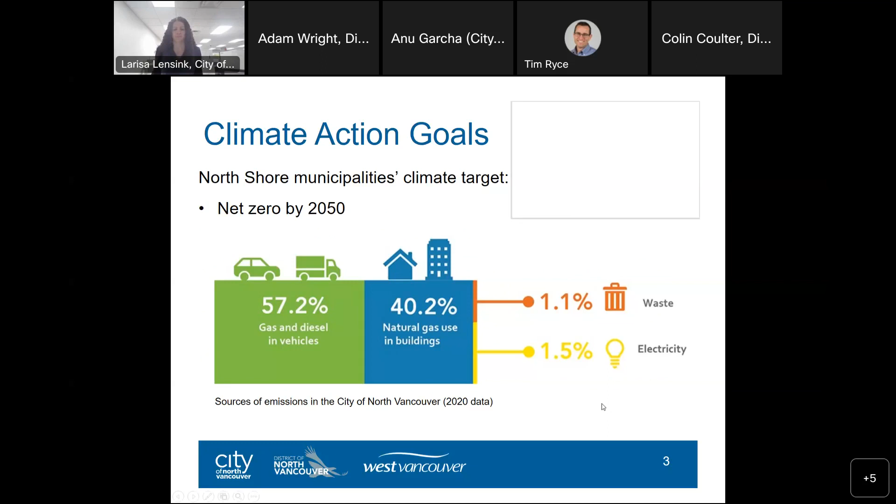On the provincial level, the province has set clear targets for new construction to be zero carbon by 2030 and net zero energy ready by 2032 in the Clean BC Plan and the Clean BC Roadmap to 2030. These two plans recognize the need to both increase efficiency of new construction and transition to low carbon mechanical systems like electric heat pumps in order to reduce emissions from buildings and improve comfort.

The primary tool the province has developed to increase efficiency of new construction is the BC Energy Step Code. The Energy Step Code provides a pathway to incrementally increase energy efficiency over time through a series of steps with defined energy efficiency metrics. The Energy Step Code is performance-based and compliance is demonstrated through energy modeling alongside air tightness testing. Local governments can choose which step to adopt and when to move to the next step along the path to net zero energy ready construction.

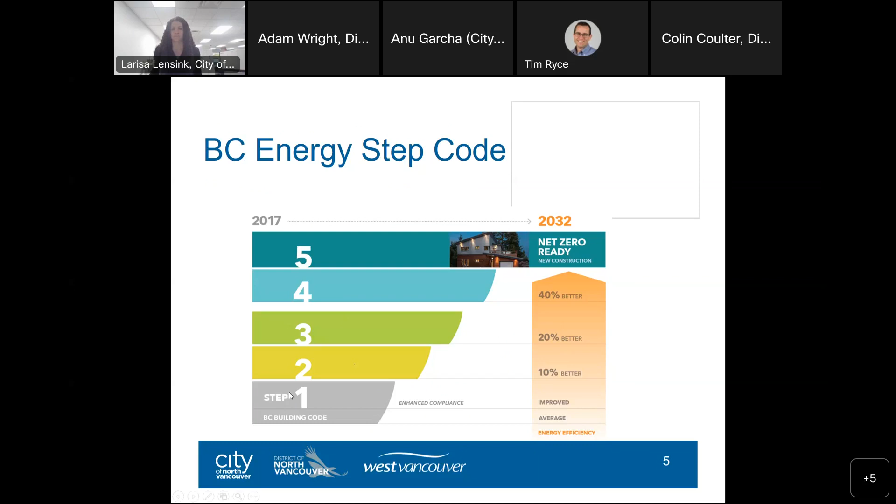Over time, the province will change the minimum energy step code requirements in the BC Building Code to ensure energy efficiency improves across the province and ultimately achieves net zero energy ready standards by 2032. As of May 1st of this year, the BC Building Code requires that all new Part 9 residential buildings are built to Step 3 across the province.

The building community on the North Shore has been a leader in achieving high energy efficiency requirements over the last decade. Prior to the introduction of the Energy Step Code, the North Shore municipalities offered a density bonus for high energy efficiency ratings. With the launch of the Energy Step Code, the North Shore municipalities adopted Step 2, which was equivalent to the current standard incentivized through density bonusing.

In July 2018, we increased our requirements to Step 3 for Part 9 residential buildings, and builders have been consistently meeting or exceeding these targets for the past 5 years. In July 2021, we introduced a low carbon pathway to incentivize low carbon energy systems, requiring either Step 5 or Step 3 with low carbon space and water heating systems, primarily achieved with electric technologies.

The 3 North Shore municipalities have worked closely together to coordinate step code requirements and provide consistency for builders across the North Shore. This sub-regional coordination has been used as a model for other local governments, and the building community that has developed on the North Shore is recognized as among the most advanced in the province.

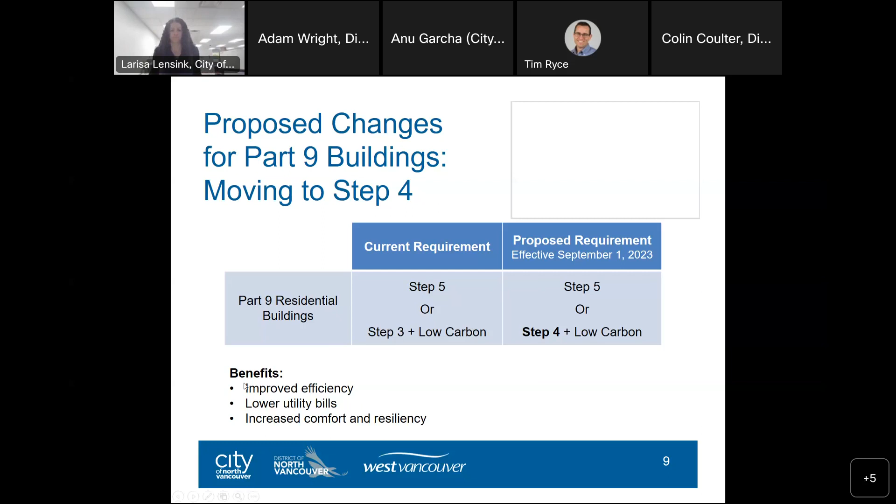The energy step code for Part 9 homes has 3 performance metrics: airtightness, equipment and systems, and building enclosure. This slide shows how the Step 4 metrics compare to our current Step 3 requirements. As you can see, each of the 3 metrics have an incremental increase in stringency.

Mary will speak more to what these mean from a technical perspective, but I will say what we are already seeing: Step 3 projects exceed the Step 3 metrics and even at times achieve Step 4. In particular, homes built with heat pumps as their primary space heating system are already achieving Step 4 levels for mechanical energy use intensity.

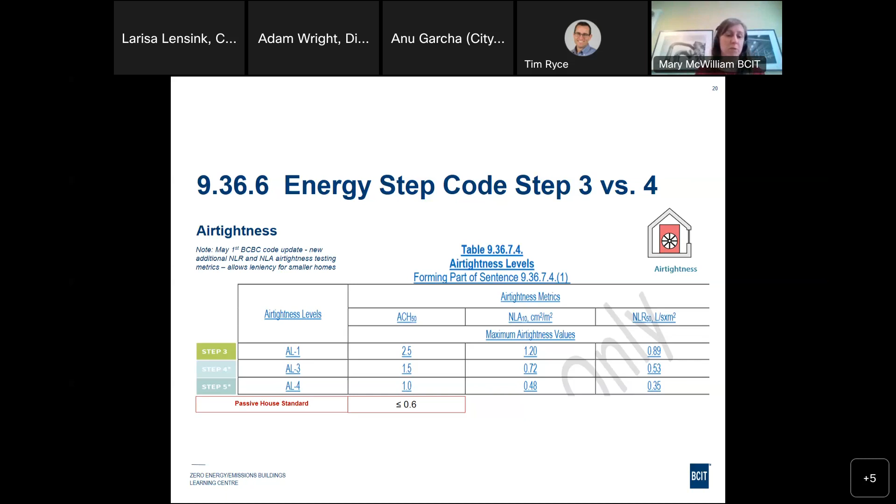Air tightness first - I think you've already seen this, but we're switching. If we move from step 3 to step 4, we're moving from 2.5 air changes to 1.5 air changes. There's lots of concern over this, but people who have been doing this for a while and have dialed in their practices are actually finding it's not very challenging, so I don't want you to be worried about that. One of the things the May 1st code update is allowing is some different air tightness testing metrics, which will give a little more leniency if you're building smaller homes like coach houses. If you're not familiar, those air tightness metrics are easier to achieve the larger the volume of your building, so smaller buildings had more of a challenge, but that should be somewhat resolved with the May 1st code update.

So what's possible? Lots of homes are already doing this. There's an example in West Vancouver, the West Bay Passive House. We've got a full video case study on that, including lots of details on air tightness, but they're at 0.4 ACH.

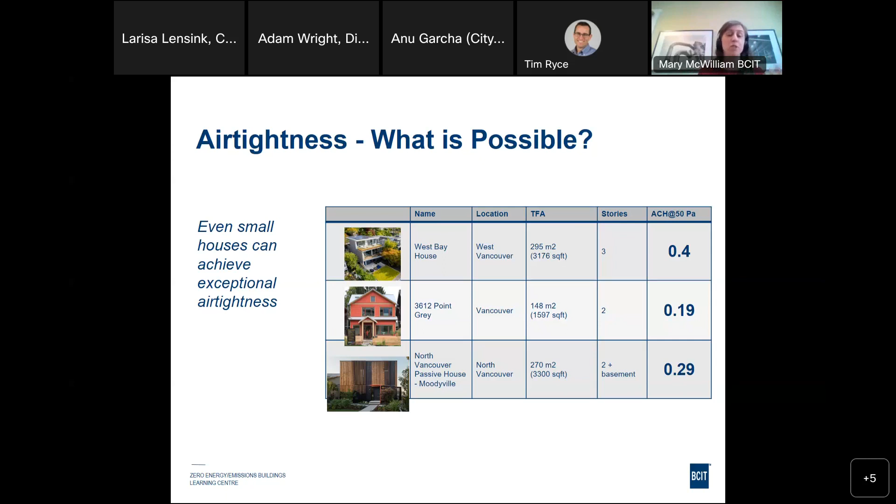This smaller home in Vancouver on Point Grey Road is at 0.19. This is a passive house in Moodyville, at 0.29 air changes. So even smaller homes, even though this isn't a larger home, can still achieve good air tightness. We've built standard air barriers with Tyvek on garden sheds in our lab with lots of windows, doors, penetrations, and we're hitting air tightness levels 3 times tighter than passive, essentially on a garden shed. So it's just practice and skill.

So the trends, what are the new skills and things we've got to do here to get from 2.5 to 1.5? What builders and teams are doing is improving those architectural designs. Here's a sample of a drawing set.

It's got a red line detail on it. So we've been really clear to understand and identify those air barrier details, work with the trades to figure out how to coordinate the trades interfaces, simplify those air barrier details, make sure we are clear going into a project about all the things we need to watch out for. We also see a clear shift to more resilient air barrier solutions - air barriers that are not easily damaged during construction, exterior air barriers, maybe more resilient materials.

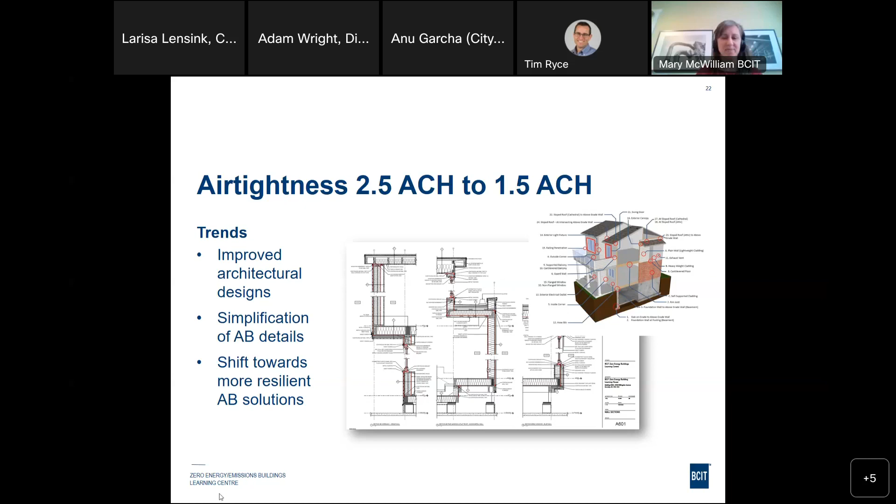Also an increased use of higher performance materials, sometimes self-adhered air barriers. They're easier to install in adverse conditions, more resilient to damage. Site supervision - anybody hitting these high levels of air tightness has a really strong quality control aspect on site. Enhanced coordination of the trades, making sure that all the trades are trained and are aware what their scope of work is and how they interact with the air barrier strategy.

When I say this, these are the things that builders are doing out there, and they're hitting tighter than passive house air tightness levels. So start adopting these practices and developing these skill sets. And step 4 certainly shouldn't be too challenging.

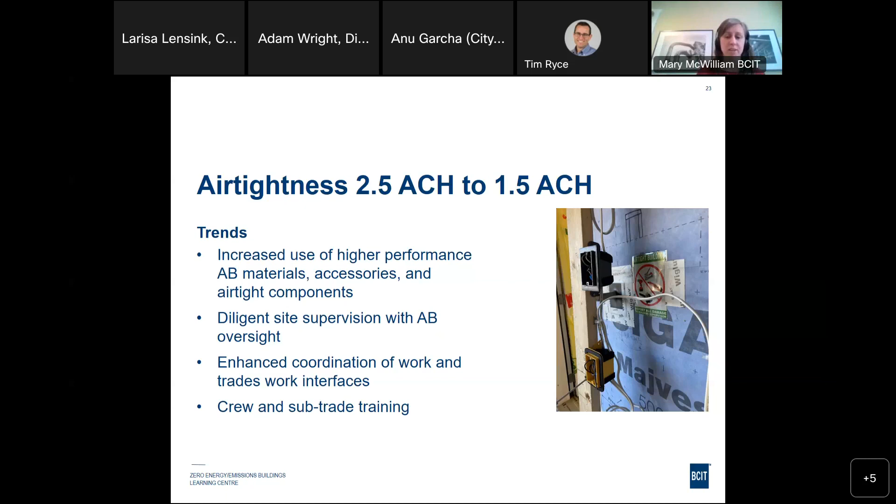So quickly look at the thermal energy demand intensity, that building envelope metric. Switching from step 3 to step 4, we're seeing a reduction - we're going from 10% to 20% improvement in the building envelope. It seems like a lot, but it's actually not that challenging in our climate zone.

Your energy advisors, I'm sure, are telling you that. Improving the insulation is the next thing, and then high performance windows and doors is in there as well.

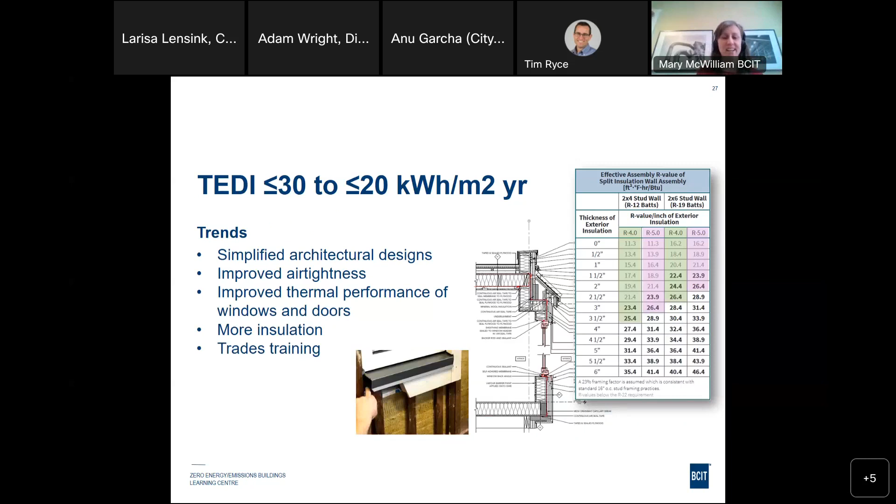I'm going to switch over to mechanical energy use intensity. On the mechanical side, step 3 to step 4 - I think I might have skipped over a slide I might mention. Thinking about TEDI before moving on to MEUI and those envelope performances, we have modeled a couple of different home types at every step of the step code in every climate zone. What we find in our climate zone here, for a craftsman style home with a lot of articulation, dormers, bay windows, really not optimized in terms of form, you are able to hit step 5 of the step code just following the assemblies that you'd see in the 2019 Vancouver building bylaw.

Slight improvements on your above grade walls, more insulation in your attics, below slab insulation, below grade insulation, beyond our code minimums, and we're able to get there. If you scale that back to hit step 4, you can probably do it in non-optimized forms, with a more craftsman style home with complex form structure, just by improving your insulation levels and air tightness levels without touching the above grade wall assemblies.

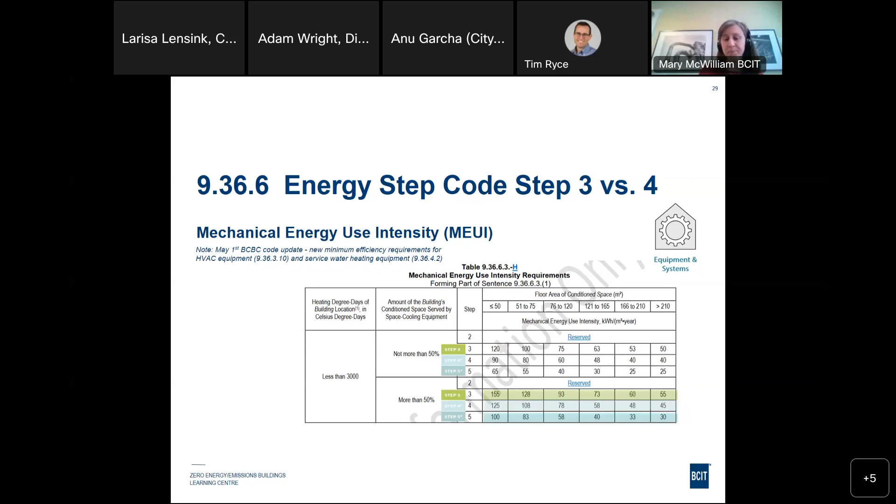Without changing the form structure or doing some serious improvements to the thermal energy demand intensity, that home was not able to hit the mechanical energy use intensity without an air source heat pump. So it's a bit of a lesson learned here to watch your form if you're looking at having any option possible when it comes to mechanical systems. Don't expect that to be the case for a really complex form, unless you plan on overshooting some of the envelope requirements. So with an air source heat pump or heat pumps, no problem, nothing much is changing.

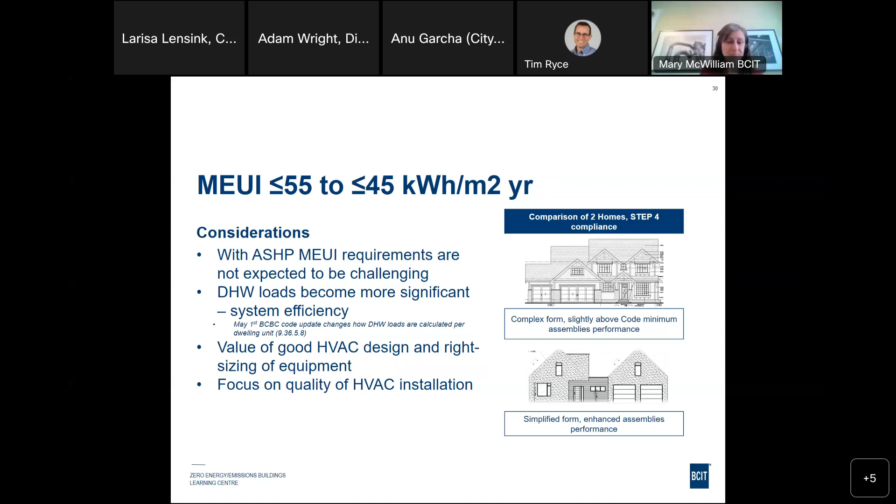What people are doing to hit these are HRVs and heat pumps. Pretty straightforward.

One of the things that is the cheapest, most cost-effective measure is right-sizing those mechanicals. We've done a number of studies, and the amount of new homes under the step code that have grossly oversized mechanical systems. So you're buying more expensive systems. They may not perform correctly because they're oversized. So being aware that right-sizing equipment and making sure contractors do that is one of the lowest cost and most effective measures.

So how do we prepare for that? Our team of instructors who are out in industry, we're getting feedback, we're responding to issues. We have developed a wide range of learning topics, from air tightness and low TEDI assembly details to mechanical systems, to site supervision, getting ready for proper planning on electrical systems to actually be net zero energy ready or start thinking about incorporating renewables, and embodied carbon and whole building life cycle assessment.

So all of these learning topics are growing in importance and urgency, and we have courses to satisfy those and develop those skills.

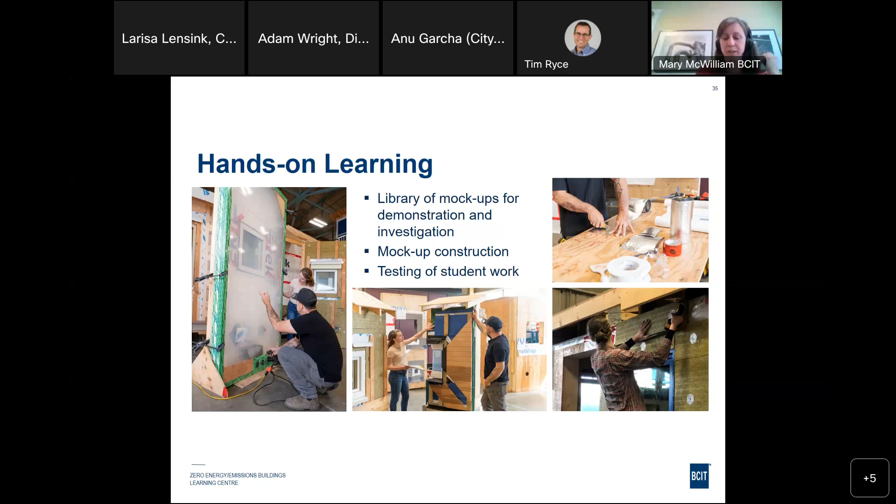That's a good opportunity for trades training in order to cut your teeth on hitting those higher air tightness levels in our lab and save yourself from learning on the job site.

Whatever it might be, from finishing trim around a window with outboard insulation, they're pulling up this library of how-to videos and making sure they capture the key elements to make sure it is airtight and thermally continuous, and they develop that skill set on the job site as well.

If you're looking for CPD points and learning units, we've got all of that as well.